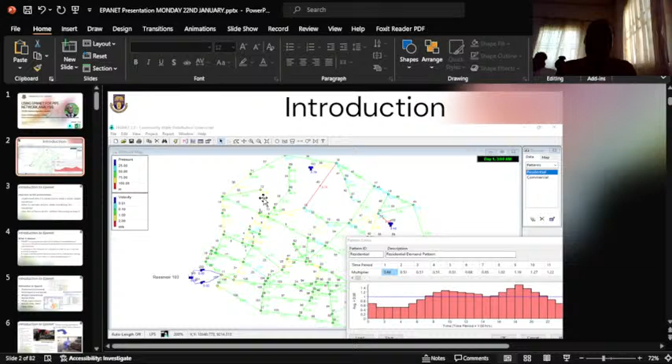So, on this slide 2, here is a diagram of a community pipe network. It has 3 pumps. So later in the presentation, we will work on this. The objective of this presentation is to understand why it is necessary to make a water supply simulation, and what to consider before, while, and during the simulation, and how the software works. Although without becoming an expert, you should be able to understand how the software works.

So what is EPANET? EPANET is a computer program that performs extended period simulation of hydraulic and water quality behavior within pressurized pipe networks. It reproduces the behavior of a network in order to carry out tests and find solutions. It makes a mathematical representation of the relationships among its components. It runs trials on what would happen if you change any particular element in the network.

There are other softwares that can actually model water pipe networks, like WaterCAD, WaterGEMS, NetPlan. And you should understand that all these others that I've mentioned are for commercial purposes, and they will charge you for using the software. But EPANET is a software that is owned by the Environmental Protection Agency of the United States of America. So they made it free. So it's an open source software. In fact, you have access to the program that was used to write it. Other softwares are WADISO, PFCalc, Branch, and many others. The name of the person that wrote the EPANET program is Lew Rossman.

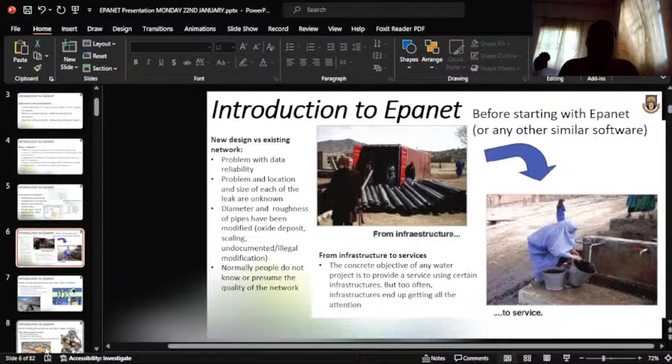Before starting with Epanet, let's look at the criteria for a successful project. The system is sustainable technically and institutionally over time. Number 2, it guarantees equal access for everybody. And number 3, it is adaptable and can be altered.

So actually, if you model a particular pipe network, you must ensure that it is adaptable, that it can be modified based on needs. For example, maybe you lay a particular pipe network along a particular path, and over time, maybe 5 years later, there was a settlement along the pipe network. So you want to also distribute water to people in the new settlement. So there will be need for adjustment and modification. So when you are laying the pipe, you must bear in mind that it must be adaptable over time.

It must be adaptable. Not only water pipe networks actually, Epanet can also be used for oil pipelines. Yeah, it can be used to model oil pipe networks. But when you are simulating it in Epanet, you have to bear in mind the difference between water and oil.

For example, petrol. Apart from the combustibility, one of the differences is that the specific gravity of water is different from that of petrol. The density of water is different from that of petrol. So when you are modeling petrol as a liquid in Epanet, you have to modify the specific gravity or the density as the case may be.

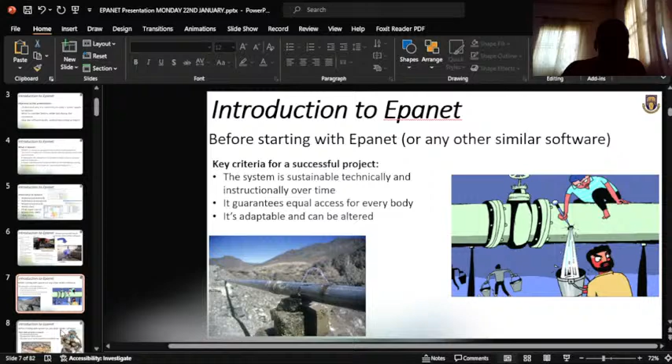So why do we build a pipe network? When there is a concentrated population and they need water, you have to build a pipe network for that, so as to distribute water to the community.

Then when there is population, when the population has social cohesion, and when the water source can be exploited in a sustainable way. For example, when there is a nearby river, instead of allowing the community to stress themselves fetching water from the river, the government can set up a water processing plant, then distribute it to the community. So before you can actually distribute to the community, you have to lay a pipe network. You have to first of all design it, then lay it.

When shall we build a pipe network? Another reason is when there is need for clean water. It's not enough to just have water. The water must be clean. Like Prof will say, apart from the fact that it must be PORTable, it must also be POTable.

It must be potable. Then also one of the things that affects pipe networks is the topography. So when you are laying a pipe network, you also have to consider the difference in height where you are laying pipe to. For example, on OAU campus, according to what I heard, water is being pumped from the OAU dam to a particular high point on campus. Then from that place, gravity will redistribute water to different parts of the water network.

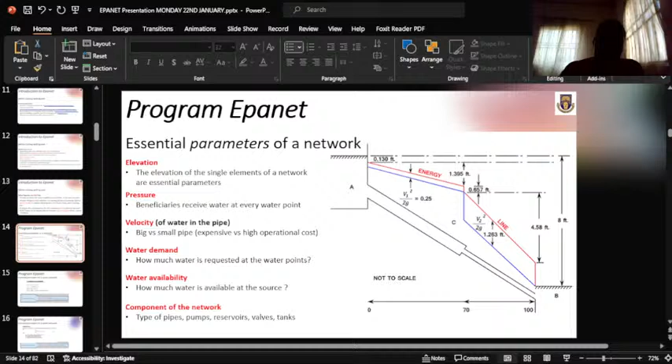So essential parameters of a network. During modeling, we'll be seeing terms like elevation. We all know what elevation is. Then we'll see terms like pressure, velocity, then water demand, water availability, and component of the network. And some of the major components of a particular pipe network in Epanet are pipe, pump, reservoir, valves and tanks.

Essential principles for a water network. So equation of continuity. In CV 403 we were taught, and I believe you have been taught also, equation of continuity, that is, what goes in should come out. So if you have V1, A1, let me write the equation. Okay, big diameter and low velocity. When it's coming out, it will have small diameter and high velocity. We talk about nozzle. You know the concept of nozzle and diffuser. So that's where we have the equation of continuity.

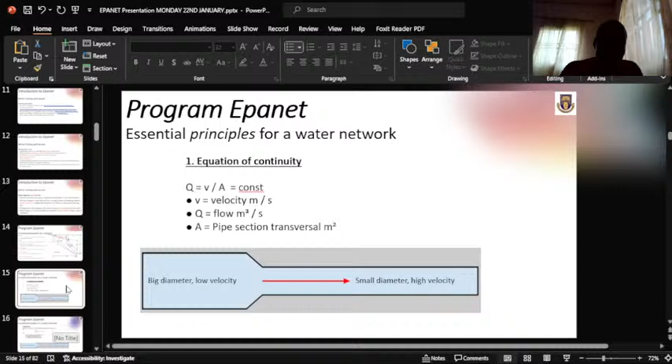So this particular part is extracted from CV 403 class notes. The algebraic sum of the flow rate in pipes meeting at a junction together with any external flows is 0. And this is the expression for that. Then another concept is the friction loss along the pipe. During CV 403, I think we were taught how to derive some of these equations, Darcy-Weisbach and Hazen-Williams.

So in your free time, you can try and derive it so as not to forget the formula. Although in Epanet, you don't need to be cramming formula. It's already embedded in the software. So this is Hazen-Williams and this is Chezy-Manning. Darcy-Weisbach is the most theoretically correct. It applies over all flow regimes and to all liquids. So we can use Darcy-Weisbach to model liquid flow in pipe network, oil flow and the likes.

Hazen-Williams formula is the most commonly used head loss formula in the United States. It cannot be used for liquids other than water and was originally developed for turbulent flow only. For turbulent flow, we talk about Reynolds number higher than, is it not 4,000? Chezy-Manning formula is more commonly used for open channel flow, when we talk about trapezoidal channel, circular channel, and the likes.

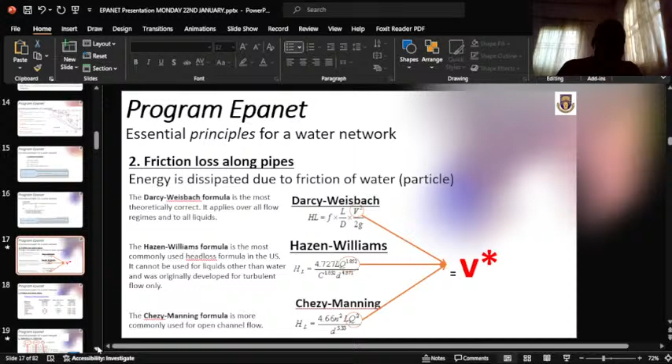Essential principles of a water network: friction loss along pipes. This means there might be some roughness along the pipe network, depending on the material used to make the pipe. For example, a pipe made of cast iron has a Williams roughness coefficient between 130 to 140. For concrete pipe, the roughness parameter is between 120 and 140.

We also see the Darcy Weisbach coefficient for cast iron, and Manning's coefficient of 0.012 to 0.015, and so on. You have to bear in mind that the roughness coefficient of a pipe network made with plastic differs. For plastic, the Manning coefficient is between 0.011 to 0.015.

Now, can you think of what would happen if a plastic pipe was laid in, say, 1950, and we are in 2024 now? Can you think of what will have happened to the pipe over the years? I think you can guess that the pipe roughness will have increased. It cannot still be 0.011. If the pipe is still in service, I can say certainly it will not be having a Manning coefficient of 0.011 again. It will have changed.

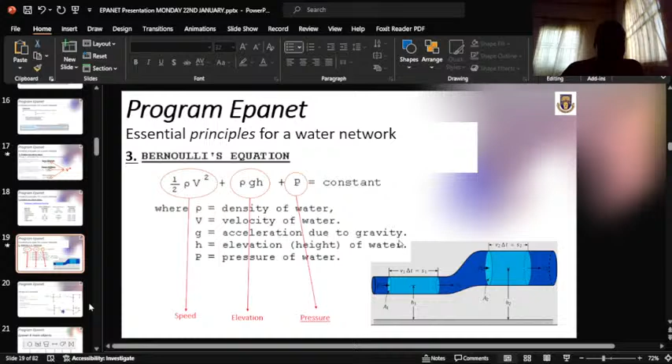So, design of a network: the network can be designed as branched or looped. According to some studies, it is concluded that a looped network is more reliable, although more expensive, because if a particular pipe is faulty, you can divert the water along another route without the burst affecting too much of the network. So a looped network is much more reliable, although it's expensive.

Okay, let's go back to the software. Epanet has 6 main objects. Here, can you see my mouse pointer on junction? In Epanet, we call this circular object junction or node. Let me go back to the slide. So we call it node or junction.

Reservoir is the water source. In some textbooks, you might see a pipe network where they do not add the water source and ask you to calculate it, because with your equations you can easily calculate that. But for Epanet, you have to add the water source. You have to state where water is coming into the network. So this is the reservoir.

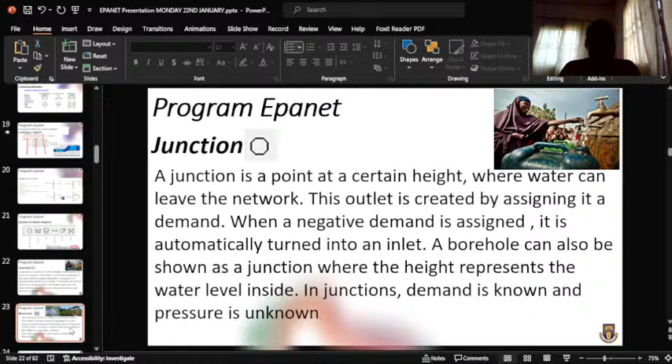Reservoir. As I said earlier, reservoir is a typical method of modeling the water source. Probably there is a river nearby, so you dam the river, and where the water is being stored is the reservoir. So this is reservoir, and this is the symbol for reservoir.

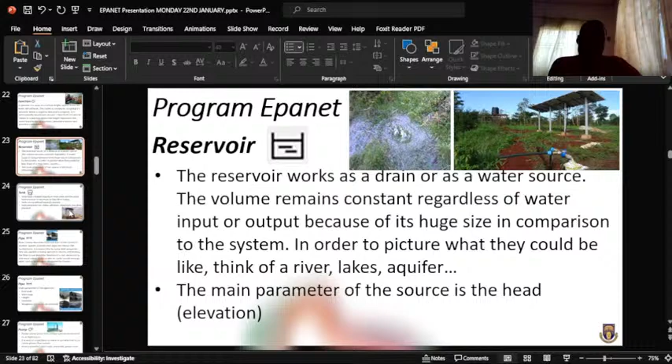The main parameter of the source is head. So for reservoir, what you just need to model it in Epanet is an idea of the elevation of the reservoir, the head. Once you see head, you know that you can easily convert head to pressure: P is equal to rho GH. So once you know the density of the liquid you are modeling, and you know the head, which is the height, and the acceleration due to gravity, you can easily calculate pressure from head.

Tanks have a limited capacity to store water, and the water level increases or decreases as they fill or empty. This is the symbol for tank in Epanet, and this is a typical example of a tank in real life. Tanks are considered round in Epanet, so the main parameters are radius, elevation, initial level, maximum level, and minimum level.

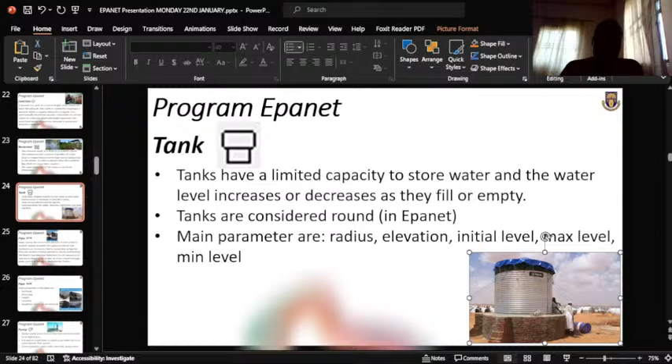Pipe. This is the symbol for pipe in Epanet. Pipes convey the water from one part of the system to another. Epanet assumes that pipes are always full, so furthermore, that is fully developed flow. You know, in ME we were taught fully developed flow. So Epanet assumes that any flow through it is fully developed, and there's an equation for that.

Furthermore, it assumes that by using their properties, pipes are capable of being opened or closed. You can actually close a pipe and open it either by a click of a button or by programming it. There's a particular aspect of Epanet where you can also do some programming, but for this class we will not delve into that, we just want to look at the basic part of it. If you want to automatically control a particular aspect of the network, you can go to controls.

Then you can do simple control, then enter the program to control a particular pipe. If you know the name of the pipe already, and you know what you want to do with it, probably you want to close it, so just program it to close and open, and it will do. We also have rule-based control. So these are the programming aspects of it under controls.

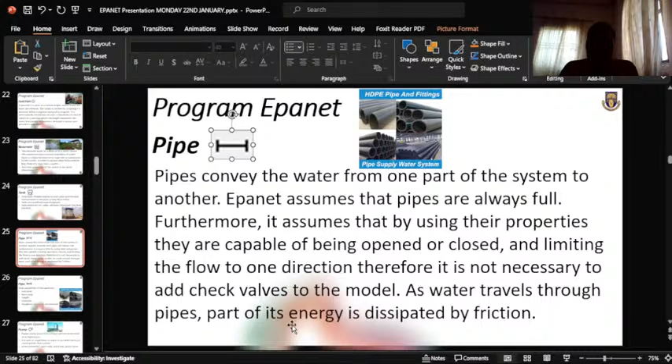So you can limit the flow to one direction. As water travels through the pipe, part of its energy is dissipated by friction. The main parameters of the pipes are end node, start node, length, diameter, and roughness of the pipe. The roughness depends, as I said earlier, on the material that the pipe is made of.

For example, this diagram we are seeing consists of HDPE pipe. You have to bear in mind that HDPE is a particular chemical technology, and it's different from PVC pipe, so their roughness parameter will also be different.

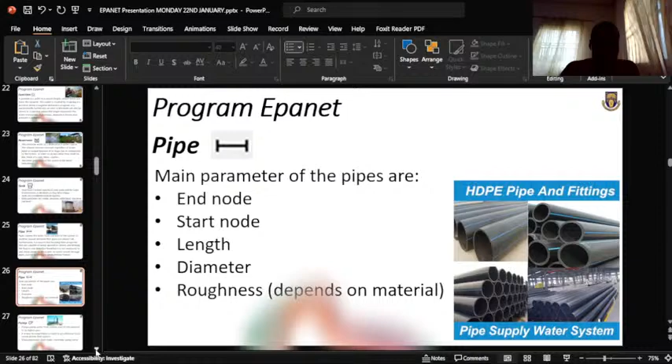So pumps. This symbol here that looks like a referee whistle is the symbol for pump in Epanet, and most of us in our environment will have seen this pump before. For some of us that stay off campus, they will tell us that in some of our residences the pump is faulty, and when they bring the object out, it looks exactly like this object here.

The reason is because sometimes you might not have sufficient information or data about the pump that you want to use. So as much as possible, you might avoid them and use other methods like a gravity flow system.

The main parameters are start node, end node, and pump curve. So when you are modeling a pump, you have to input the pump curve data. We are going to do that before the end of this class.

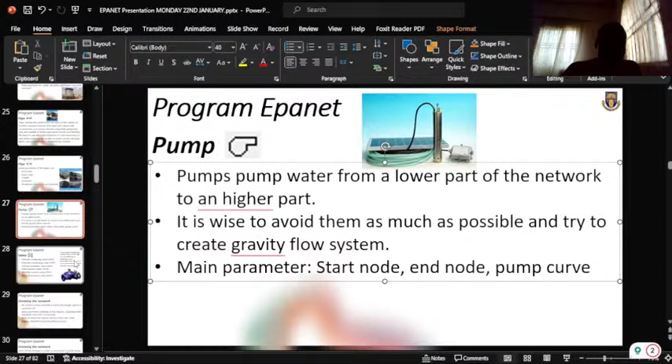Valve - so this symbol here is the valve. There are different types of valves in EPANET: pressure reducing valve, pressure sustaining valve, pressure breaker valve, flow control valve, throttle control valve, and general purpose valve.

Try to avoid using valves in developing contexts due to their high cost and difficulty in obtaining spares. So if you are modeling a particular pipe network, according to expert advice, try to avoid using valves because once it spoils, sometimes it might be difficult to find a replacement.

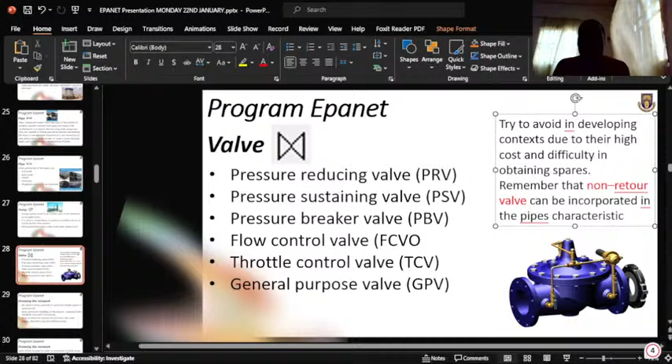Remember that a non-return valve can be incorporated in the pipe's characteristics. This is a little bit more advanced for this level.

Now, drawing the network - no need to draw precisely if the automatic length option is switched off. In this software, we are going to model pipe networks, and bear in mind that under preferences and defaults, we are going to set that the length of each pipe should not be automatic. Once it is not automatic, it will be easier to draw the pipes.

Keep automatic labeling of the objects. Updating labels manually will be very time consuming, so make the labeling of the objects automatic.

Keep in mind that EPANET doesn't have an undo option, therefore save different trials. This is actually a challenge with EPANET, and they haven't resolved it, probably because it's government software. That's why they've not really resolved it. You're supposed to have redo, undo, just like in Microsoft Word or Excel, so that you can go back to the previous edit or repeat the last action, but EPANET cannot do that.

So you have to be saving at each stage. Sometimes when I'm modeling with EPANET, after writing the name of the project, probably for a community water network, I have to say stage 1. When there are any new changes, I need to be able to track them. When I want to save another change, I will save as, for example, community water network stage 2, stage 3, and so on.

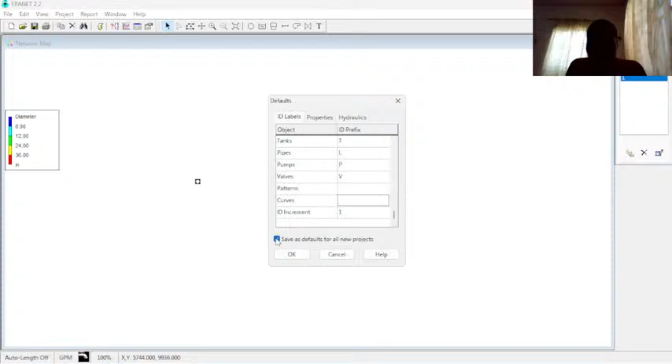Then patterns. You can have different patterns in Epanet, so you can leave that for the meantime. Then curves. Normally Epanet will give you curve names as 1, 2, 3. Even patterns also 1, 2, 3. So you can just leave that for now. What you have done, you can set it as default: save as default for all new projects. So select this button. Okay.

So now view. I want to follow the slide. So we've set the ID labels, we've set the prefix already. Now default properties. So come to properties. Under properties, node elevation, leave it like that. Tank diameter, leave it as this default value. Then auto length, make sure it is off.

Then the pipe length, you can set the default as 1000. Pipe diameter in Epanet is automatically in millimeter. Pipe roughness coefficient 100. So you can leave all these defaults. Then flow units. So this is gallon per minute.

In our CV403, when we are given a particular flow exercise to solve, sometimes they might give us the quantity in liters, sometimes in meter cube. When they say we should find the flow rate, probably in meter cube per second or liter per second. So if you are modeling in Epanet, you have to set this. We have gallon per minute and other units. Here we have liter per second. There's no meter cube per second here, so it's better to convert meter cube per second to liter per second.

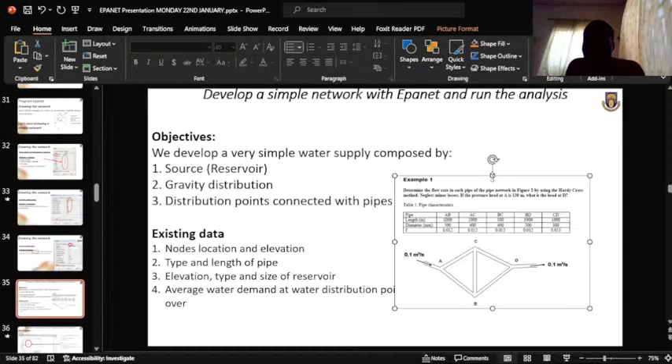This value of 0.1 at the inlet and 0.1 at the outlet is supposed to be 1.0, it was a typo. So bear that in mind. Let me expand this picture here. Sorry for that. So determine the flow rate in each pipe of the network by using the Hardy Cross method. Neglect minor losses. If the pressure head at A is 130 meter, what is the head at D?

So here now, we want to model the flow in this particular pipe network. We want to know what is the flow rate along pipe AC, AB, BC, CD, and BD. So we want to know the flow rates in each of them. So what we are going to do now is we'll model it in Epanet.

So existing data, the data that we have is the nodes. We have the node location and elevation. We have the type and length of the pipe. We have the elevation, type, and size of reservoir. And we have average water demand at water distribution. Actually, for this pipe network, we do not have, this is a typo, we do not have the size of reservoir, but we are going to model reservoir and give it a particular value. Average water demand at water distribution points. So let's model it in Epanet.

And before you now, I want you to pay attention to this. For example, now you want to model water network for a community, and you want to position each of your pipe at the exact point that it will be in real life. So that means you need the map of that community. So Epanet allows you to use real life pictures, real life map. So what you just have to do is that you obtain the JPEG of that map, then convert that JPEG or PNG file of the map to bitmap.

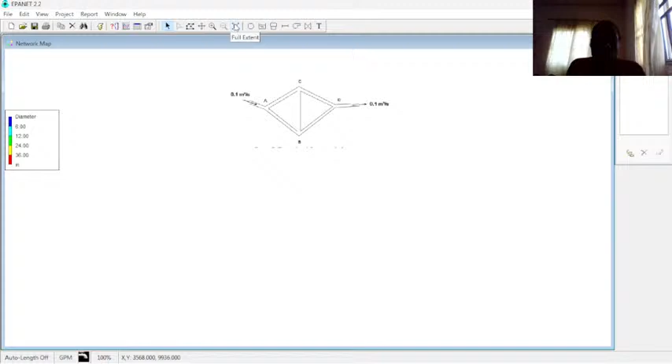So this is the backdrop. This is just picture. This is not the network. This is just the picture from the notes. And you can drag and move this picture around by coming to this option. Select region, pan, zoom in, full extent. So I want to pan. You see? So you can carry it comfortably anywhere you want it to be. Then you can zoom it in and out. So it's large enough as it is now. So the next thing I want to do is follow the slides religiously. So let me go back to the slide. So after importing it, I've imported it.

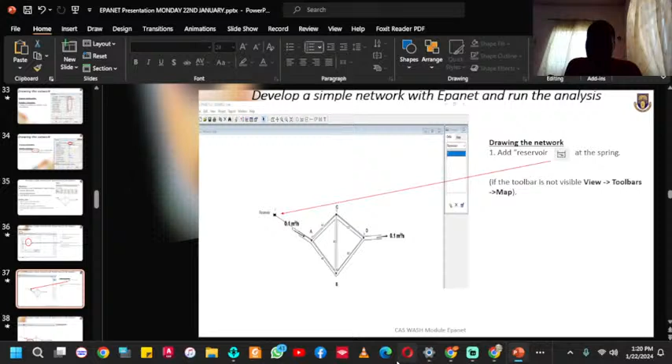So come to slide 37. Add reservoir at the spring, so the source of the water. Now in the notes, they did not actually give us any parameter for the reservoir. So here we are going to use a reasonable value.

So, reservoir. This what I selected now is junction. I want to select reservoir. So this is reservoir. Select reservoir. Then you can see that water is coming in through this side. So reservoir should be positioned somewhere close to that. So I've already positioned my reservoir.

Now immediately I'm dropping any object, I want the name of the object to be showing. So for that, I have to go and set it up. Come to options. So when you come to options, nodes. Let it display the border and junctions. Come to links. Let it display proportional value or display border.

Come to labels. Then come to notations. Now all the notations, they are not highlighted. So I want all their notations to be showing. So come to display node ID, display node values, display link IDs, display link values. And you can increase the size of those IDs. But for now, font size 7 is okay.

So then come to symbols. Make sure you click all this. Then come to arrows. Now the arrows is none. The arrow will show you the direction that the water is flowing in the pipe network. And you remember that when we are calculating in CV403, if you are getting a negative value, that means the water is going in the other direction.

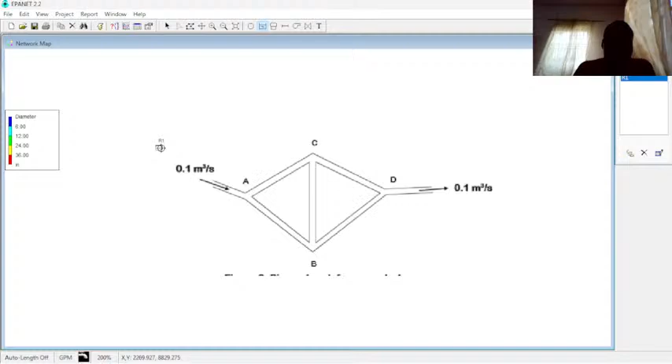Now, what do you see? You see that the reservoir, because I already said that my reservoir prefix should have R in front of it, so R is already in front of the first reservoir, R1. So this is my reservoir. So let me go back to the slide. Then eventually zoom in. I've done that. Now join the network. Click twice on R1 and add the parameters. Setup of borehole or reservoir appears. Coordinates do not play a role here. So come to total head and input a reasonable value there.

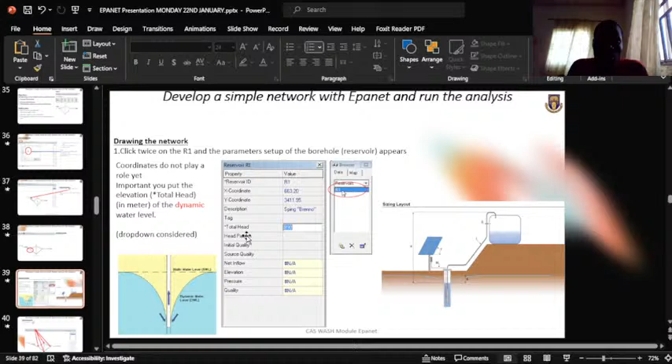So for this reservoir R1, total head, let's put a reasonable value there, because in the notes we're not given, but we have to demonstrate the source of our water.

So click on the object. Once you click on the object, in the property browser, it should be displayed. Then click on the object edit properties. You see this pencil and book icon under the reservoir. So click on it. Then under total head, put a reasonable value of head, say 20 meters or 10 meters. Okay. So it already has 10 meters as the total head.

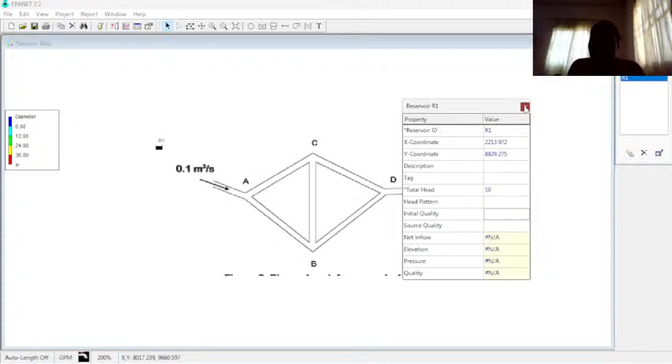Now come back to the slide. So let's go to the next step. The next step says add junctions. So add all the junctions. And in the picture we have 1, 2, 3, 4. We have about 4 junctions to add. So let's start adding them.

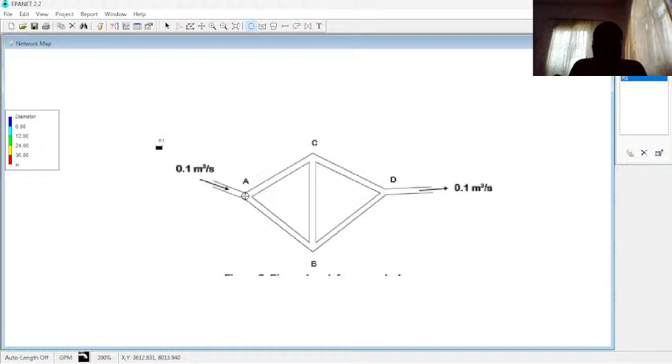So junctions or nodes. Come to this add junction. Click on this circular button. That is the junction symbol. So come to this backdrop. This is the position of A. So you can just drop the junction at A. So you see J1 written there. You can modify the name later, but for now leave it like that. At junction C, put another junction there. B, put another junction there.

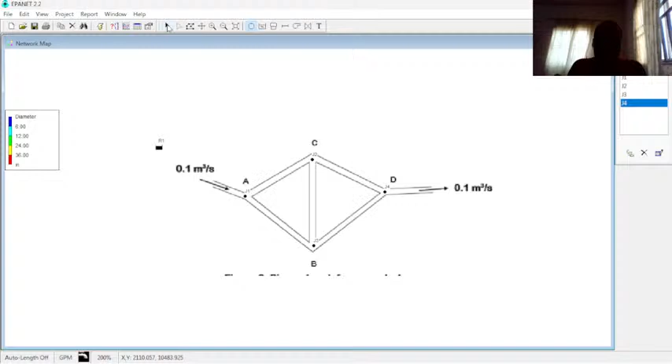Another junction. And as you are dropping the junctions, on the project property browser you will see junctions displayed, and all the junctions that are available in the project. So after that, you have to drop the tool. Come to select object symbol, click on it, so as to drop the tool. Then you select the object, and then you click on the book and pen icon.

So now look at this. The elevation of this point, you can leave the elevation like that, but the base demand there, you see this 0.1, actually it was a typo, because later in the notes 1.0 was written there. So let's put 1, base demand 1.

For the demand pattern, leave it as it is. It's not applicable in what you want to do there, so leave it as it is. So after you have modified J1, that is this junction 1, now to make it easier for ourselves, we might rename our junctions as in the backdrop. So I want to rename this as A. So you see A written there now.

So I want to rename junction 2 as C, according to what we have in the backdrop. And I want to do the same thing for B, and for this J3 as B, J4 as C, as D. It's because the network is not very voluminous, so that's why I have the time to be changing the names. In a situation whereby the network is very voluminous, you might actually consider not changing the name at all. You might just set up a prefix for it from the beginning, like I have done before.

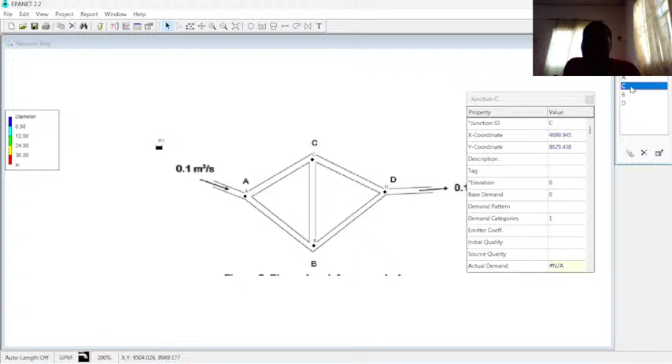So now I want to change the elevation. Okay, the elevation, leave it as 0, so that water can just flow from this 10-meter reservoir down to the network. Then base demand. The base demand here was not given, so leave it like that. Come to base demand for B, we are not given, leave it like that. Come to base demand for D. The base demand for D is 1 also, not 0.1. Later in the material, in the notes, they put 1.0 there also at the exit, so put 1.0. So leave it as it is. So we can close it.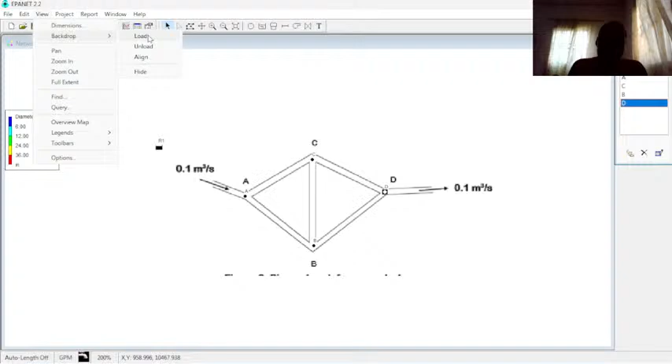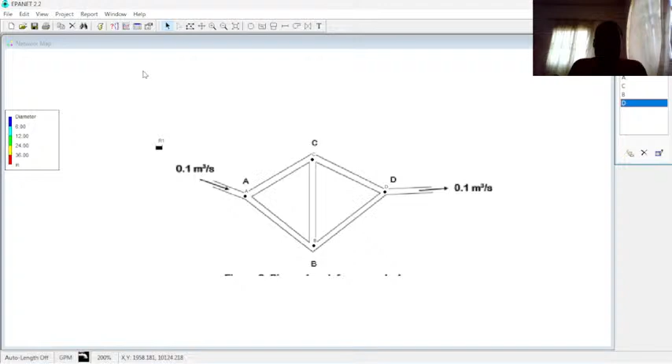So after that, something is lacking in our pipe network. And what exactly is that thing? For you to know what is lacking, actually you should be guessing it already. So let's go to view option, come to backdrop. Because you have already loaded the backdrop, we have different options: you can load it, you can align it if it's not aligned, but our own backdrop is aligned already. And you can hide it. I want to hide it now so that we can know what is lacking in our network. You see that there is no pipe connecting all the junctions together. So we want to add pipe now. Unhide it, show the backdrop. So I want to add the pipes now. So come back to the slide.

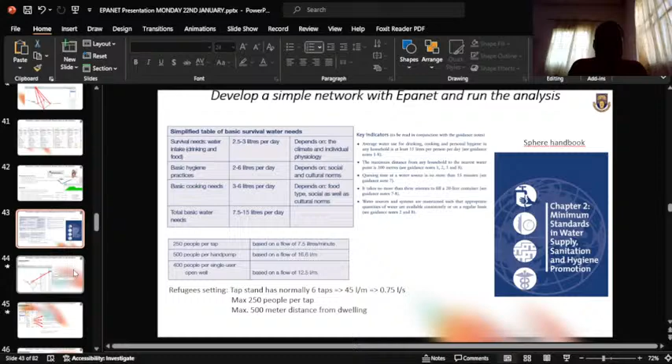So connect the reservoir to junction A. So that is connected. Then another pipe from A to C. So that is our pipe AC. Then pipe C to D. Pipe D to B. Pipe B to C. And pipe B to A. Now, there's an error in the way I'm modeling it. Escape. The direction, where you are starting from and where you are stopping, also matters in Epanet. So let me delete what I've done and remodel it.

I want to assume that water is flowing from the reservoir. It flows to A, distributes to C, also distributes to B. Then I want to assume that C distributes to B, and then C distributes to D, and B distributes to D again. I want the water to be flowing this way and not backwards. So if you are drawing the pipe C to A, it might not really be appropriate. So let's delete it and redraw it again. Delete.

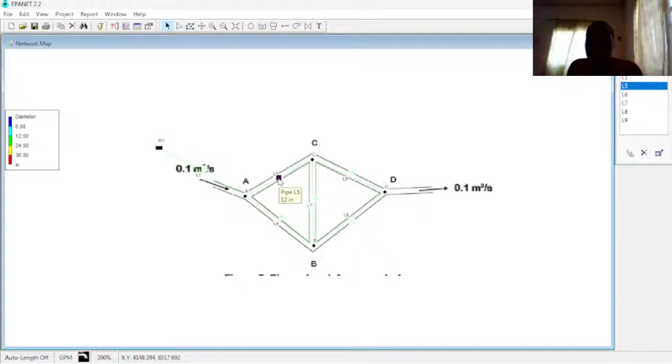So this pipe L5, because it's between A and C, I want to name it as pipe AC. So come to this pen and paper, property of the object. Click on it to display the property of that particular object. Then under pipe ID, change the ID to AC. Do the same thing for the next pipe. It's between A and B.

As you see, it's blinking. For you to be able to trace which pipe you are dealing with, you see the pipe blinking. So AB, then pipe BC, that's our L7. BC or CB? Because I said that the water should flow from C to B, let me name it CB. If the direction is not appropriate, it will tell us in the result.

Then CD, which is L9. So that's our CD. Now L8, that is BD. So after you've done that, you can close the object property.

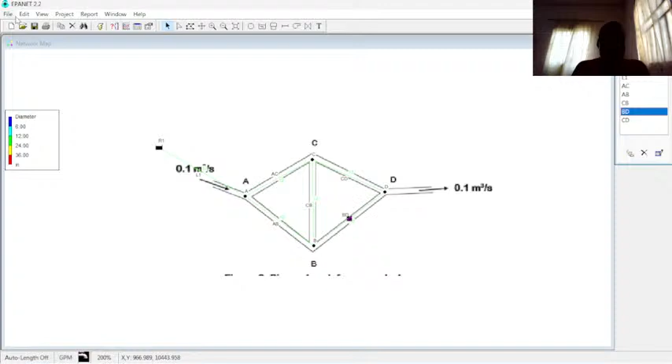And since morning, I've not actually saved my work. For best practice, it's better for you to save your work, because maybe your laptop doesn't have a backup or one thing or the other. It's better to save as much as possible. Currently, EPANET does not have auto save.

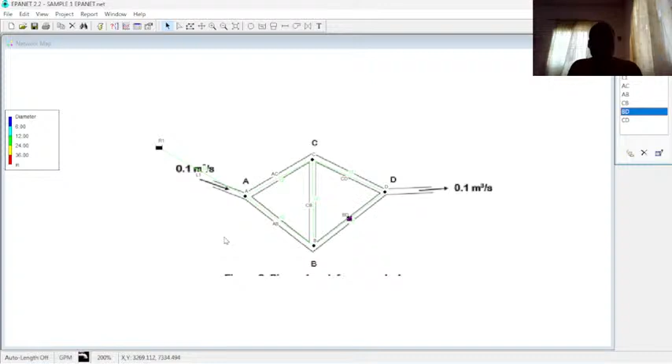So save as sample 1, EPANET, under downloads. Save. So now it's backed up already. So we have this now. So let's go back to the slides.

For the length of the pipe, give it 1000, diameter 400, roughness 0.012, loss coefficient 0. Loss coefficient does not matter in what we are modeling currently, so you can leave it at 0. Initial status, let the pipe be open. Don't close it, and don't put a valve there. It can have a check valve to restrict flow, but don't use a check valve. Just open the pipe.

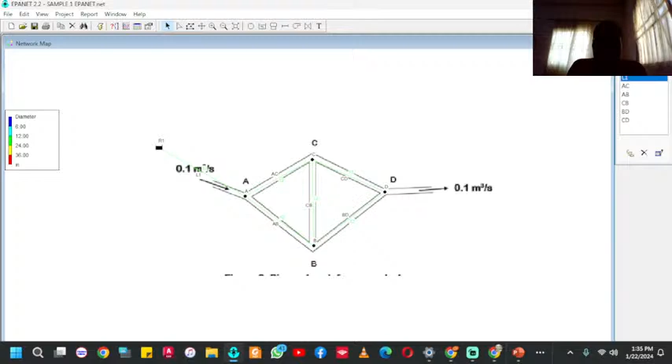The next slide shows what is expected of each of the pipes in the network. So let's quickly put all these properties in the pipes. For pipe AC, we can follow what is given in the class notes. Okay, not there, but I have it in this slide. So for pipe AC, 1000, 400, 0.012.

So let's quickly put those parameters. 1000, then the diameter 400 in mm, roughness 0.012. Loss coefficient not applicable. Then pipe AB. From the slide, pipe AB has length 1500 and roughness of 0.012. 1500, 0.012.

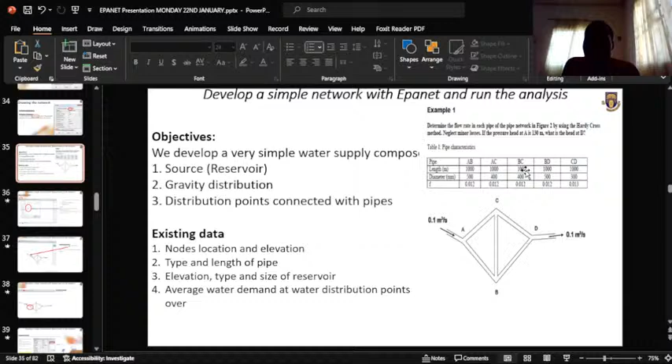After that, what else? So pipe BC, pipe CD, uncheck property again. 400, 400, 400, 400. Okay. Is it the same? So it's supposed to be 400.

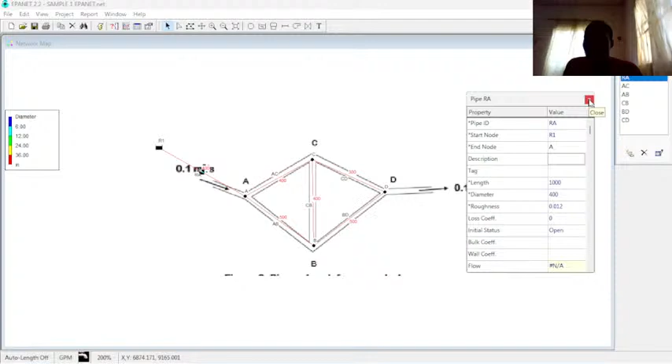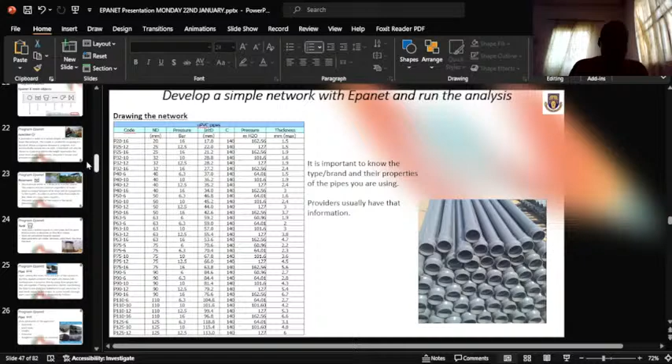So after inputting all these parameters and drawing the network, it's better to know the type or brand and properties of the pipe. You see under the roughness, we're using 0.012 to 0.013. So which of the equations does that follow? That is Manning's, in Manning's units.

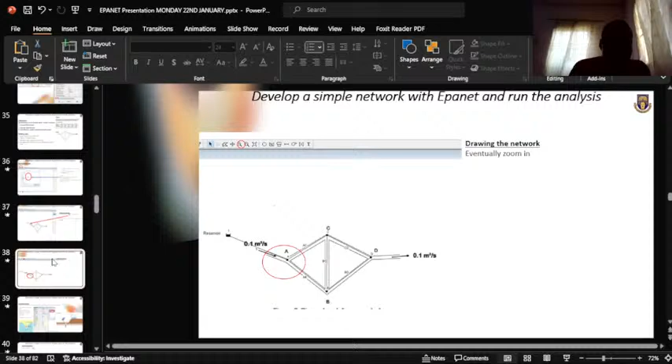After inputting all the parameters, let us run the pipe network. If there's an error in the network, it will tell us there's an error at a particular location, in the status report. So let us run the analysis. It doesn't take time to run; within milliseconds you will get the result. So click on this fire button.

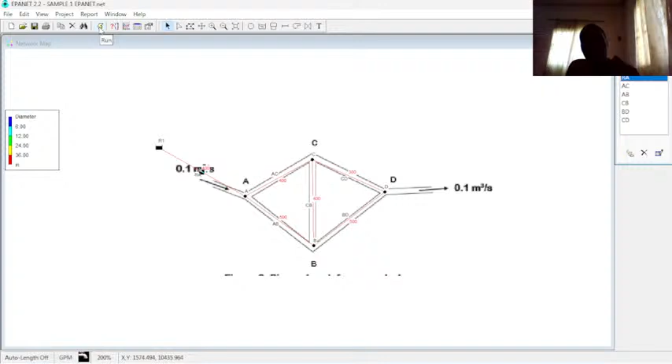You see this fire button here. Come back to the project Epanet program, then click on run. If you don't want to use this button, you can come to project and then click on run analysis—it's the same result. So click on run. Run was successful.

And so to see this clearly, I want to hide the backdrop. So this is our pipe network, and the program has been run already. Come to the object browser on the upper right hand corner, click on map. Under the map you see node—that's where the junction properties are. Under that, click on elevation, and it will display the elevation of each of the junctions.

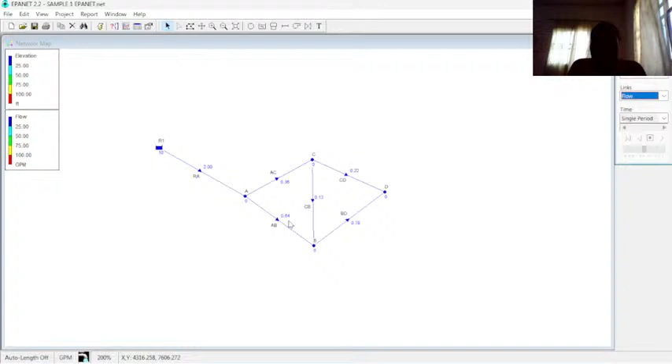Then under links—I told you initially that links also means pipe—click on links, then under the button under it, click on flow. You want to see the flow. Now you see: here we have 0.36, 0.64, 0.13, 0.22, 0.78. If you compare these values with the class notes, it's just a few decimal places different from each other. So let's compare it.

This slide is talking about the analysis report. So come to this now. You see that if you compare the answer from the hand calculation and the software calculation—this is the hand calculation, and this is the simulation result—if you compare the answers together, you see that it's almost the same.

Pipe AC has 0.363 using hand calculation; from the software we have 0.36. Now pipe AB, we have 0.637, approximately 0.64 in the simulation result. Pipe CB, we have 0.149; here we have 0.13. Pipe CD, we have 0.214; here we have 0.22. Pipe DB, in the hand calculation we have 0.786; here we have 0.78. So you see that the result is not really far away from each other.

So Epanet can—if you want to do this calculation by hand now, it will take you about 20 minutes. But with Epanet, if you know how to quickly drop the node at each location and connect the pipes together, within say 8 minutes you are done with it. So it actually makes it faster to model a pipe network.

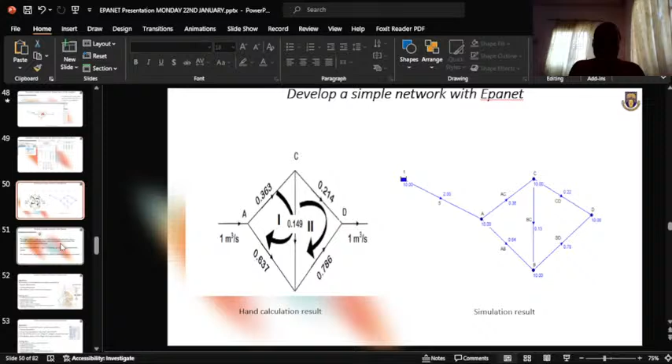Epanet can actually help you estimate that. Once you know the cost of energy, you can estimate the cost of buying fuel and the likes. If you want to model something like that, you'll need time-dependent analysis over time, say for 24 hours, for 2 days (48 hours), or for 3 days (72 hours), and the likes.

Before you can model something like that, you have to know the quantity of water used in that particular pipe network, say around 12 a.m. in the middle of the night. Can you compare the amount of water people in the community use around 12 a.m. compared to when they're waking up early in the morning around 5 a.m., preparing to go to work or preparing their children for school?

If you say the amount of water is 100%, that is 1.0, the amount used around 5 a.m. will be close to 100%, close to 1.0. You can estimate it as say 0.85. But for 12 a.m. in the middle of the night, maybe someone just wants to flush the toilet, urinate, or shower. The quantity of water will not be much for most people, so it will be around 0.3, 0.35, 0.4. You understand that kind of stuff.

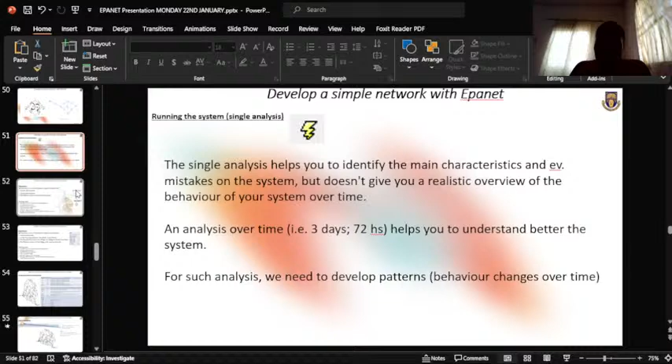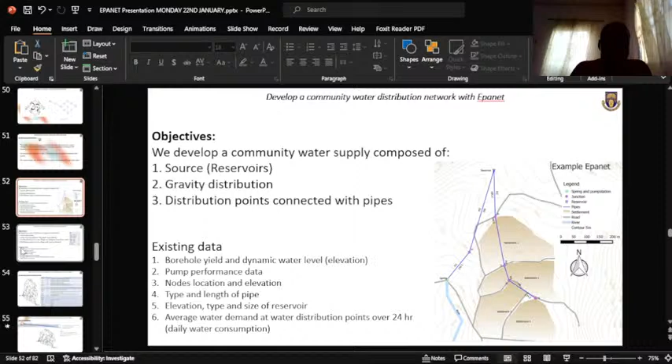So we want to model something similar to that. For such analysis, we need to develop patterns of behavior changes over time, as I've explained. We want to develop a community water supply composed of a reservoir, distribution network, and distribution points connected with pipes. We'll also be modeling a pump pumping water from a water source, with more distribution points than the first simulation.

Then we model, and in this particular one we are given a lot of data. A lot of data is available here. Let me expand this part of my slide so everybody can see it clearly.

In this second simulation, we'll have 72 junctions altogether, 2 reservoirs, and 2 tanks. Number of pipes: 108. Number of pumps: 3. Number of valves: 0. Flow units will be liters per second.

Because of the time it will take to model about 72 junctions and add 108 pipes, then connect them—it's easy to connect the pumps—after dropping the nodes and junctions and connecting the pipes, you still have to enter each pipe's characteristics one by one, just like we've done before. You have to input the length of the pipe. Let me go back to the slide that talks about that.

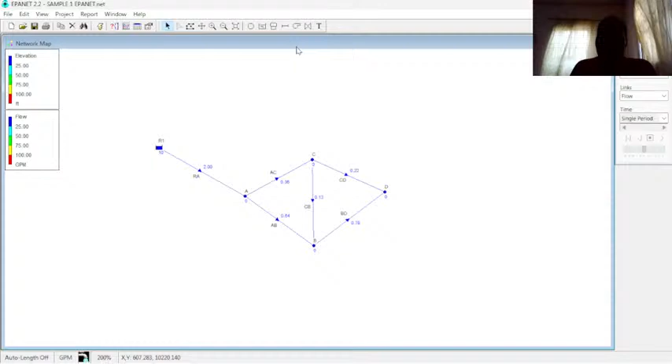So open the second simulation. I also open it from my own end here. Let me save my work. As I said, if you want to track changes, you might need to save in stages. So let me practice what I preached. Save as, I've saved it already, but I want to save in stages to track my changes. So save as stage 2, sample Epanet stage 2.

So I want to close the program now. Actually, for me to open a new project, I don't necessarily need to close it. But to make things easier for everybody, let me close the program and open a new one.

So I want to use the link. Click on community water distribution system .net. Yeah, that's the .net file, community water distribution system .net file. Click on it, then download it. Download the file. After downloading it, open it in Epanet, or just make sure you know where it is saved on your PC.

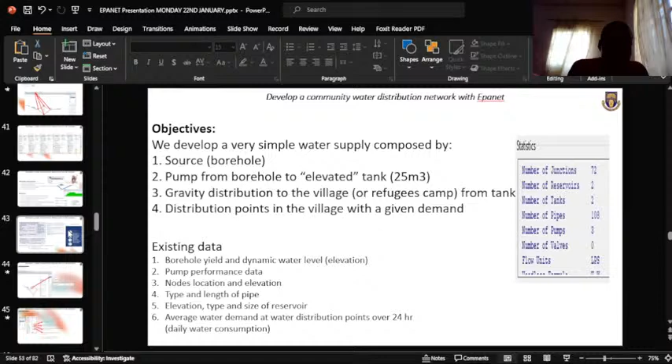I jumped it in the initial part. Yeah, population projection. I said the formula somewhere. Okay, so this is it now. So population projection: you can do the arithmetic projection, geometric projection, exponential projection for the population.

For example, in that community now, let's say that there are 850 individuals in that community. So you can do arithmetic projection for the population so as to design for the next 10 years or 20 years. You know that people will be giving birth to more people. Strangers will be coming to the community and going. And of course, naturally, some people will leave the earth.

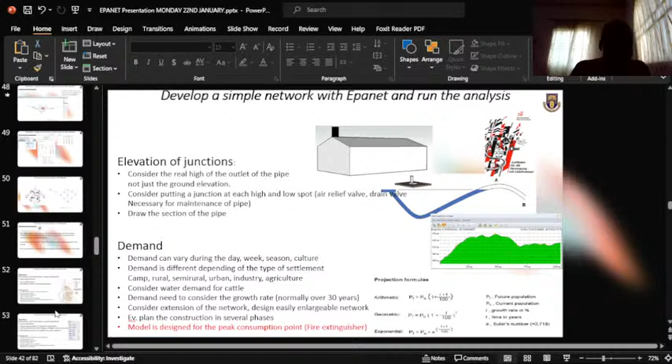So you want to project for the population, so you can calculate what will be the growth. If you know the growth rate, you can calculate what will be the population in 20 years time. So with that now, you can design the pump and the water system to be adequate for like 15 to 20 years. So that is the essence of population projection in water pipe design, water network design. Let's go back to the main stuff.

So then you also determine the type of pipe that you want to use. So I want to do something here. This folder that I give you access to, try and open the folder and you will see a particular assignment there. Don't look at it as if this is for MSc or blah blah blah. No, don't look at that. Just look at what is inside it. It's not too difficult. It's what you are familiar with before.

So this is the, let me expand it. So this is the notes. Try and look for these notes inside the folder that I give you access to. So look at the pipe. This is where the pipe data was given. So for pipe 1, pipe with ID 1, where it will be connected, it is time consuming to track all these ones. When I was modeling the network, it took a lot of hours to do that, because you have to trace pipe 104, where to start from, where it will end, input the pipe length, pipe diameter, and the likes.

Then you have to also determine the roughness of the pipe. For example, pipe 1 is made of cast iron, and the pipe age is 20 to 30 years. So the roughness will have changed over the years. The same thing with PVC pipe, the same thing with MDPE pipe, and the likes. So these are the pipe data. So come to table 2, network junction data.

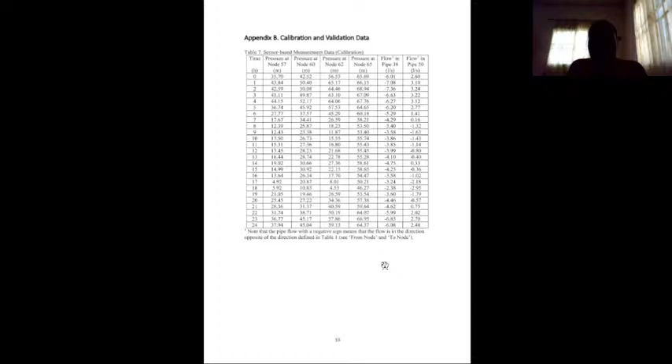Now, calibration and validation data. For the scope of this work, we will not delve into this aspect because this actually deals with models, when you're talking about the concept of machine learning. So we will not delve into that here. I want to go back to the slide now.

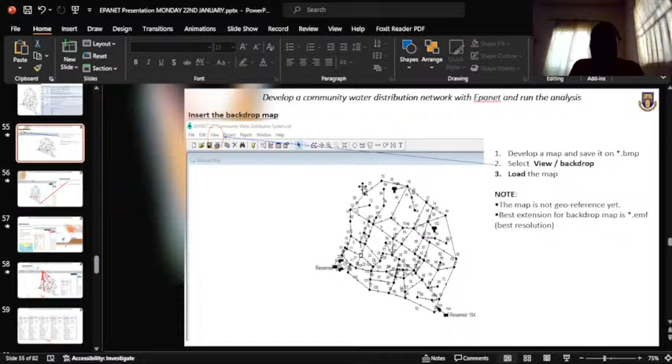So, slide 55 now. So insert the backdrop, we've done that. Then join the network, add reservoir at the appropriate points. So we have two reservoirs, so add them at the appropriate locations. So we've done that in the network.

Then slide 57, join the network. So as I said, that is a very complex one. So you have to take your time. If you actually want to do it, of course, I can guide you, but it will take a long period of time. So you have to be patient to insert all the values one by one and accurately. So add junctions. So you have to add all the junctions appropriately as seen on the table in that particular brief that I sent.

Then the junction properties. So you have to input the junction properties as seen here. Even for the pipe also, you have to input the parameters for the pipes. Then elevation of junctions. You consider the real height of the outlet of the pipe, not just the ground elevation. Consider putting a junction at each high and low spots. Draw the section of the pipe.

Then demand. Demand can vary during the day, week, season, culture, as I mentioned initially. Demand is different depending on the type of settlement. Maybe markets, that is commercial, or residential, that is where people are living. Camp, rural, semi-rural, urban, industry, agriculture. Consider water demand for cattle.

Demand needs to consider the growth rate, normally over 30 years. Consider extension of the network. Design an easily enlargeable network. Eventually plan the construction in several phases. Then the model is designed for the peak consumption point. Then fire extinguisher, also known as fire hydrant, that is where you can get water for emergency purposes. You can also model that inside EPANET.

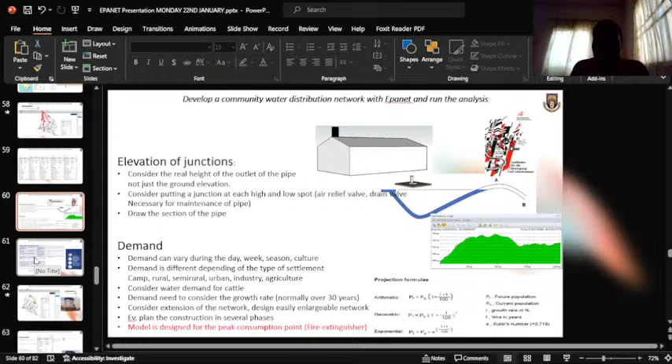Join the network, add tank. Actually, I've not modeled any tank in this work. So let me go back to EPANET and show you that. So this is the symbol for tank, so add the tank. For example, this tank here now. I've already modeled it, so let me just click on it. Click on the properties for it, this pen and paper button, to show the properties of the tank.

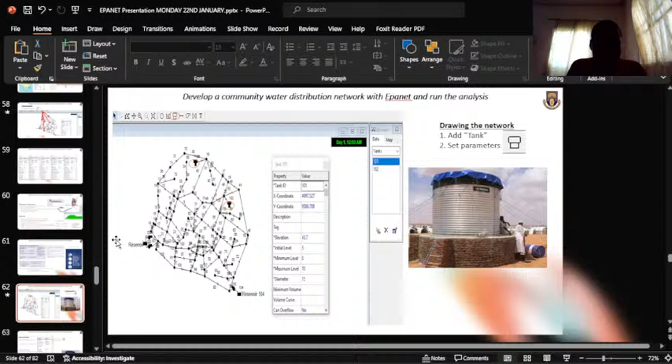So join the network, set parameters for the reservoir. So also model the reservoir. Initial water level in the reservoir is 1 meter. Then adding the pump. So you should also add the pump. Now, before you can add the pump, let me show you around. For example, this is the pump. But before you add the pump, you have to add the pump curve, because when you are modeling the pump, it will ask you for the pump curve.

So the best thing to do is to first of all come to the object browser here. Then click on data. Then under data, you see another button to press. So click on this down button. Then select curves. I've already modeled a curve there, but let's say I want to model another curve. So click on this add button beneath it, beside this cross symbol.

Once you click on the add button, it brings you to a blank space where you input the pump data. But for now, I want to just use what was there before. So come to this former one, open it, open the property. Then you see you can give it a description, head flow curve for the 3 pumps.

Pump, then the head equation. Actually, you are not the one to determine this equation. Once you give it this data, the software itself will generate the equation applicable to it. So this is the pump data that we were given inside the brief. So this is the curve. The pump, and EPANET will draw the pump curve by itself.

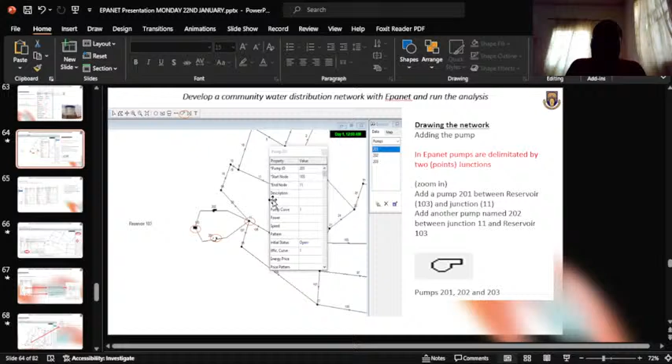Now join the network, so adding the pumps. Add pumps between 2 nodes, between a node and a junction. Bear that in mind. You can add the properties of the pump as seen here. Then create the pump curve as I said initially, and then add the identity of that pump curve to each of the pumps that you have modeled before. The same thing is being explained here.

Then adding the pipes. You add pipe between nodes, between node and tank, between node and reservoir. Then join the network, adding the pipes. For the pipe property, you have to include the length as seen inside that brief that I sent. Length, diameter, roughness, and the likes. You put all these properties. Then the status, check whether it is going to be opened or closed.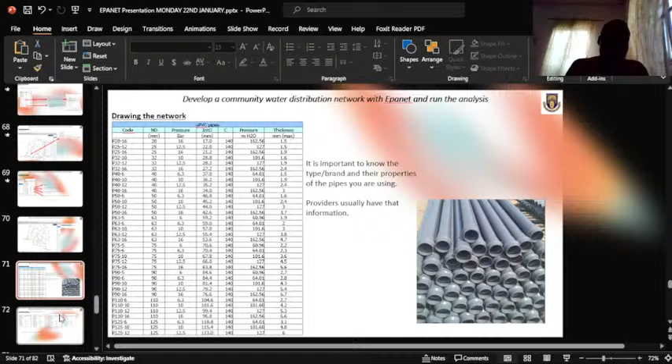Very important. So adding the rest of the links so that the network will be complete. Be careful and make sure that you add the specific property of each of the pipes. If it is a PVC pipe, know the kind of roughness coefficient to use for it. If it is cast iron pipe, know the kind of roughness coefficient to use for it also. After adding the pipe parameters, length, diameter, and everything, you can go to the next stage, which is running the analysis.

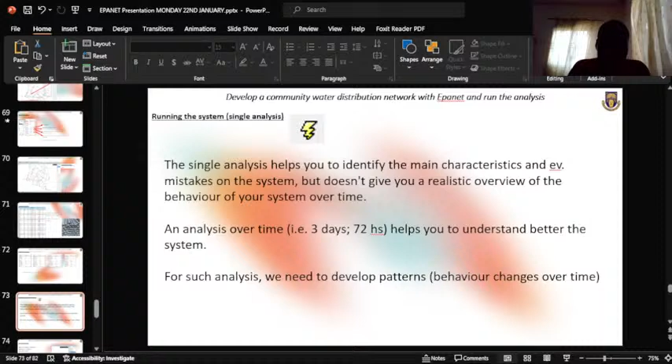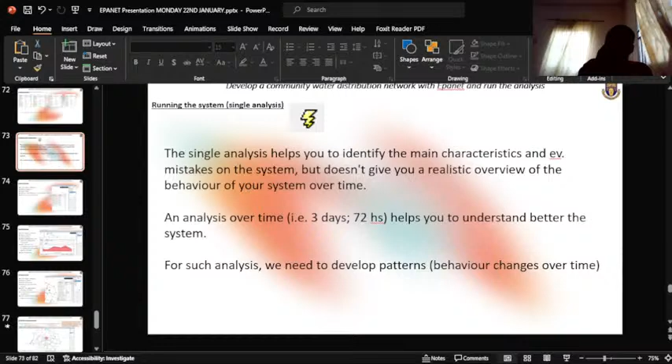Now, we want to run a time analysis. Because it's a community network, we want to examine each of the nodes and see if the water will be adequate at a particular point in time. We are given the data for each of the locations already. The residential demand pattern is given as this. The commercial demand pattern is given as this. So let's go to EPANET and model this table 3 and table 4.

Come to the project object browser, come to data, then patterns. But first, before you go to patterns, go to options. After options, scroll down to times. Select times. For total duration, we want to do only 24-hour analysis, so under duration, put 24 hours. After including that, you can leave the other ones in the default mode.

You can close it. If you want to do 72 hours, then you have to put 72 hours here. But we want to do 24 hours, so 24 is okay for the brief that we were given. After that, you can close it. Then come to data, click on this down button, then go to patterns, then insert the patterns.

If you are starting afresh, of course you will not have this residential and commercial. It will be blank. If it is blank, you just click on this add button, then give it a name. Residential pattern ID, for example, res, that's the ID. Give it a description: residential demand pattern. But for now, we will follow what has been there before. Then under the multiplier, give it a particular value as given in the brief.

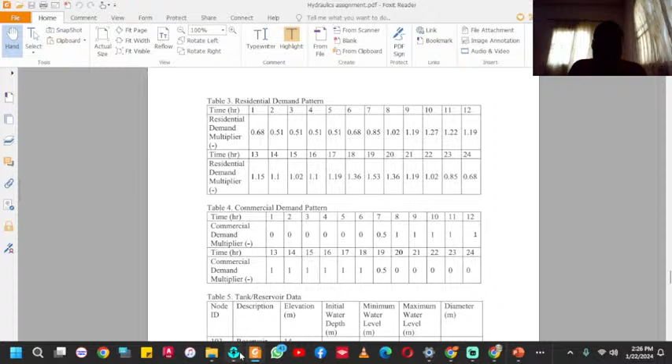Let me check the brief. For example, residential at 1 o'clock 0.68, at 2 o'clock 0.55, 0.51. So come here, 0.68, 0.51. As I'm inputting the data, it will be plotting the graph for you automatically. If I put 3 here now, it will quickly plot the graph. These ones are not relevant because we have it there already, but this is how it is. When you are done inputting all the values, just click on save and continue. For now, cancel. You don't need it.

Delete it. Come to residential demand pattern and look at how it is. We have already input all the demand pattern for it, 0.68, 0.51 up to the 24th hour. At 20, that is 8 p.m. in the evening, 1.36. And this is the plot. Look at the way the plot is rising and falling. That's the demand pattern. The highest demand is at 18 and 19 o'clock, that is 6 to 7 p.m.

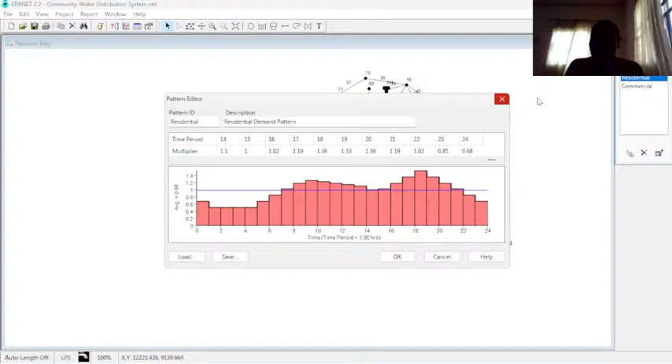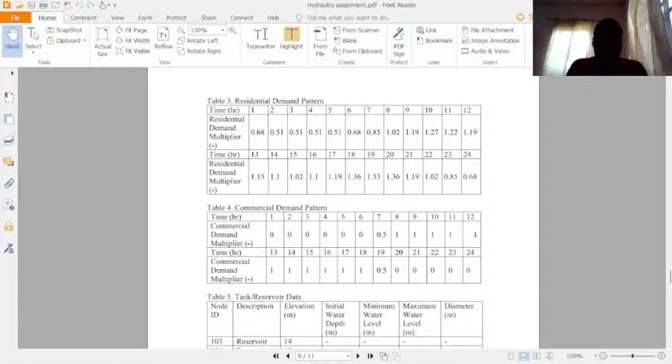For commercial, let's check that. Close this window. Commercial. Look at it. No demand from 0 to 6 a.m. No demand from 6 p.m. to 12 a.m. But there's demand from 6 a.m. to 6 p.m. That's reasonable for a particular marketplace. Once you've input all the demand patterns, then you can run a time-based analysis. Let me go back to the slide.

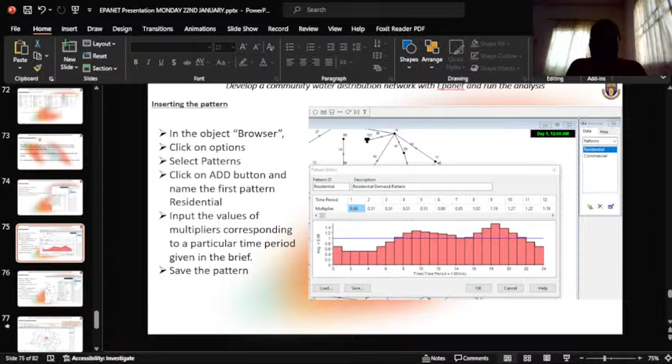So in the object browser, as shown, change the time setting to 24 hours. Then in the object browser, click on pattern, then the add button, then input the pattern data for everything.

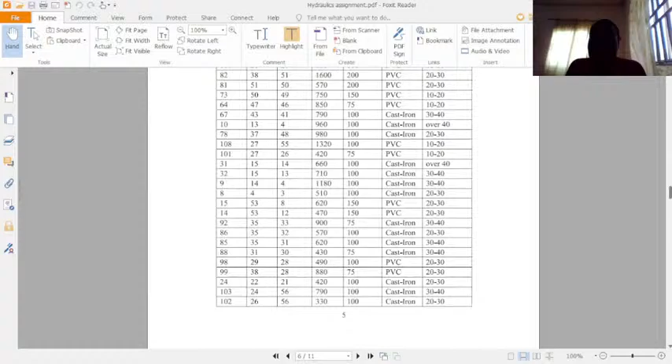Under hydraulics, check the material units you are given. For example, in this brief, let me go back and check what units we were given for flows. Baseline demand residential is in liters per second. Let's check the pipes data - I can see the data is given in liters per second. So when you do your hydraulics setup, you have to change everything to liters per second, not gallons per minute.

So under hydraulics, let me go back to the Epanet software. Come to project browser, data, click the down button, click on options. Under options, click on hydraulics, double click it, and under flow units, click on liters per second. It's already actually in liters per second by default, but if you're given gallons per minute or other units, you can select them here. For now, we leave it as is.

So we are almost done with the modeling. After inserting the pattern, come to running the system.

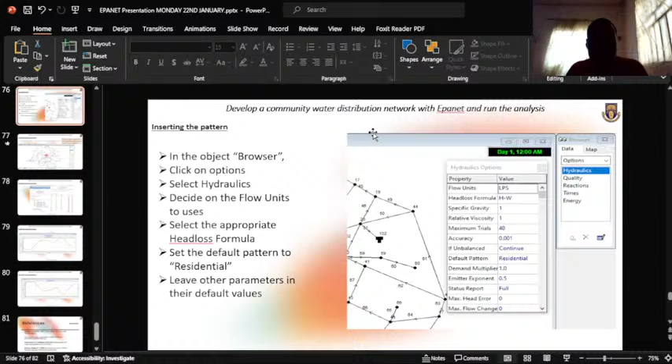This is single analysis, time-based analysis. Once you input all the necessary things, you can come to run the analysis. Click on the fire button, or as I said initially, go to project, run analysis - either of the two options. Click on fire button. Run was unsuccessful - see status reports.

The report shows an undefined curve at 0.75 efficiency in the energy section. This means the pump property is not accurate. Let's go and correct that - the efficiency of the pump curve.

So let's set it to 100%, and let's run the analysis. Run was successful - you see, the run was successful. I need to review the network to know the reason why it is not accepting 75% efficiency.

The analysis has run, and you can go to a particular link to examine what is happening at a specific junction or link in the network. I think that's about that. Then you can check the summary reports - before we call it a day, let's check the summary reports.

Status shows it has run successfully. This is the background information about the analysis. Then go to report again, click on full report - it will give you a text kind of format. Click full report, then generate the full report, but actually there's no time for that.

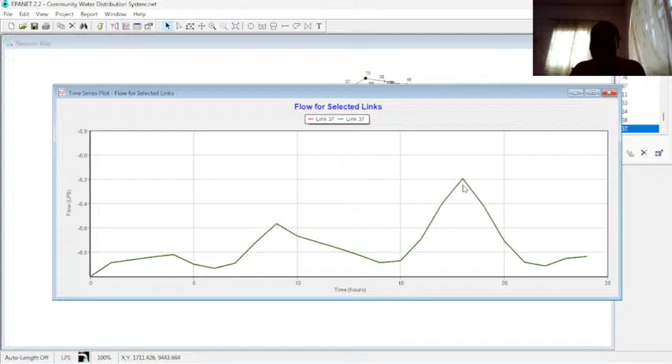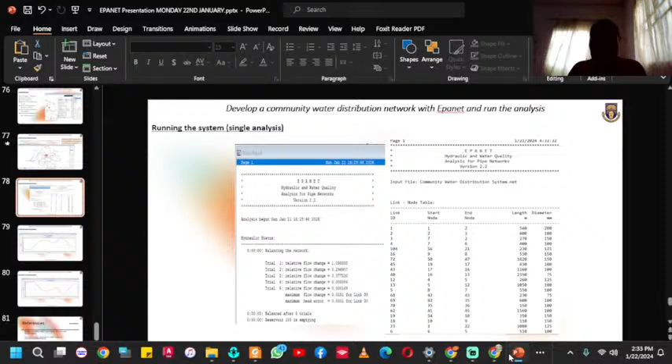The materials used in this presentation were gotten from Epanet's Environmental Protection Agency website, and also part of the slide was gotten from a presentation by sheltercluster.org. Also, the textbook used was Featherstone and Nalluri, and some materials here are from Professor Oladipo's class notes. Thank you very much for listening to class.